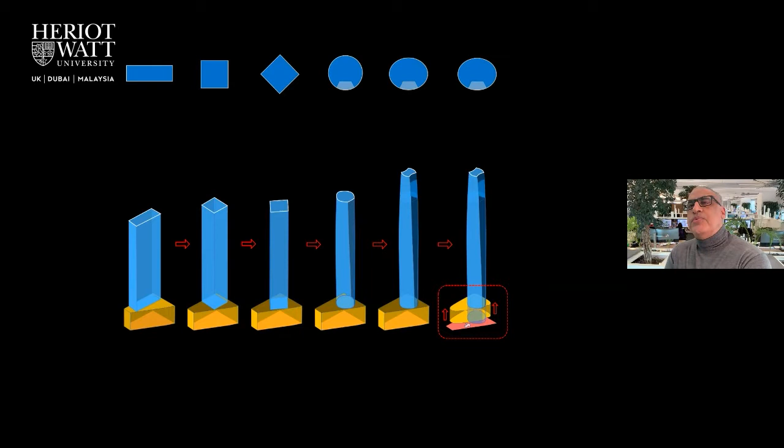And over a period of workshops with our client, the First Group, we came to realize that the challenge we face in some ways is not that different from a square peg in a round hole. How do we design a tower on a property that's designed for a rectangular building? And we felt actually what we wanted to do was a circular building.

And not only that, our aspirations and our client's aspirations were that this building should be unique, not just in its form and its aesthetics, but in its use and in the experience of the inhabitants. So we introduced naturally ventilated gardens. There's 12 gardens that go up the tower. And we did all of this through a series of workshops.

So when we were first looking at the project, it was about 300 meters in height, plus or minus, which would have made it, I guess, around the 8th or 9th tallest building in the world as a hotel. And then we worked with our client, the First Group, to introduce vertical gardens. These are these gardens that go up the tower. And when we did that, the building grew by 10%.

And then we felt that there was a unique opportunity to introduce a public facility, which is an observation deck, which will be open to the public, and can be used to really go up the tower and to get these phenomenal views. And so once we did those few moves, we went from 300 meters all the way to 365 meters, which made it the tallest hotel tower in the world. We did not start out with that target. It was a byproduct of our research and also our design iterations.

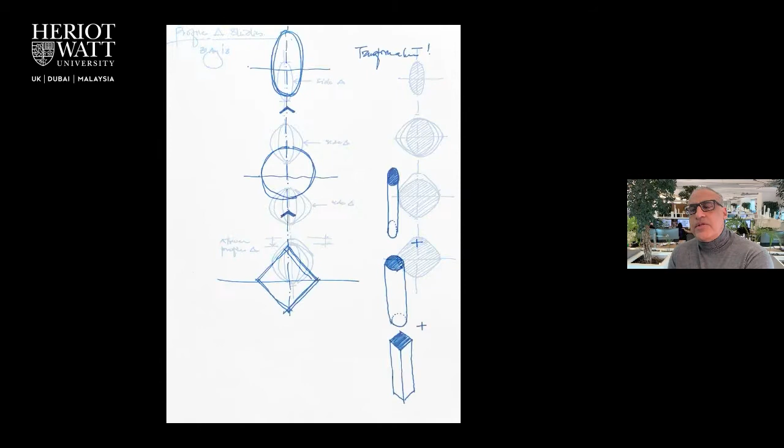We believe in the connection between the hand and the mind, and the use of paper and pen to find ways to express ideas, to convey those ideas, and also to test them. So these are some of the very early sketchbook ideas which started to look at this super tall building in terms of transformational geometry, how the geometry of the tower would transform and how the shaping of the tower would be sympathetic to the very strong sea breeze that comes and hits the building.

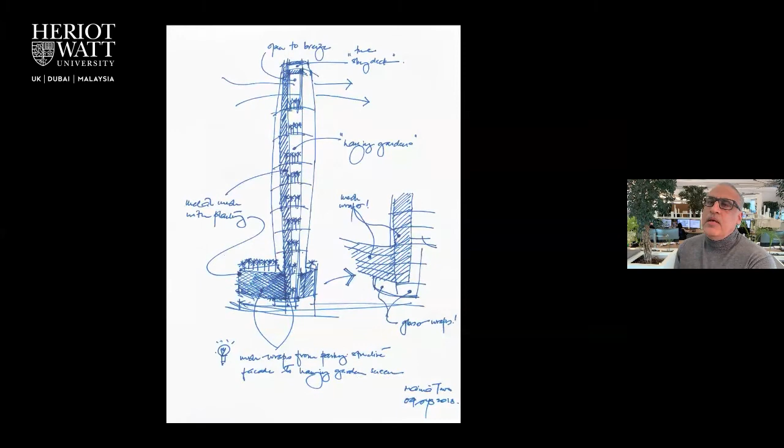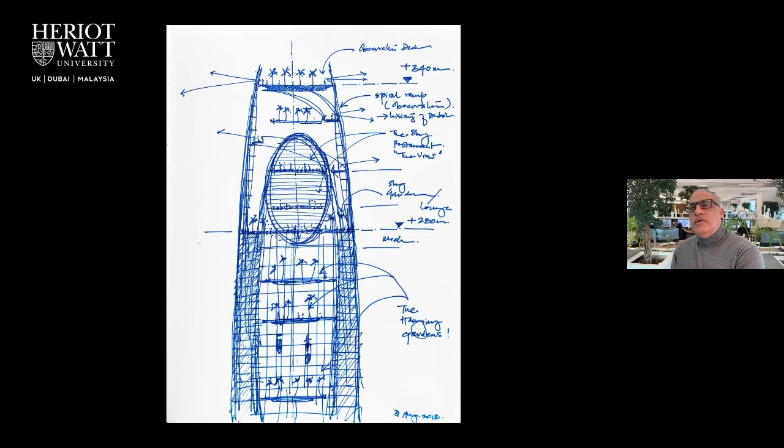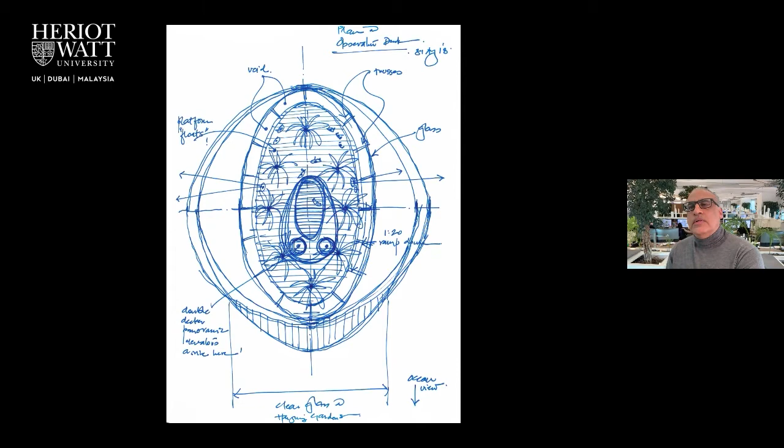And then very early, this idea of these gardens and how the tower would rise from a landscaped podium and introduce these naturally ventilated atrium gardens through the height of the tower. And we also felt that the very top of the tower was a unique opportunity. And we eventually proposed a public facility which will be open to visitors, school children, to take them up to a garden at the very top of the tower, which has spectacular 360-degree views of the city.

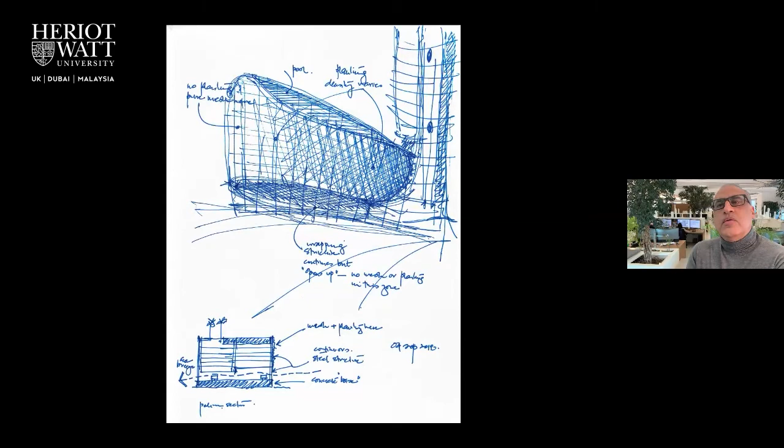And how the tower and its podium weave together, the interface between the horizontal and the vertical, was extremely important for us. And we spent a lot of time making the podium work. And we did that by lifting the podium to introduce a public space. So the parking structure is lifted up by 9 meters, and we end up with an urban drop-off space, which is the entrance to the hotel.

Now, the fact is that design is messy business. So you start out designing in a particular way and you move along, and then one day you get a call, and in this case, a client called us halfway through detailed design. So we'd been working on the project for a year. And they said, we've changed our mind. Initially, the project was going to be 2/3 hotel and the top 1/3 was going to be apartments. And the client decided that they would like it to be all hotel.

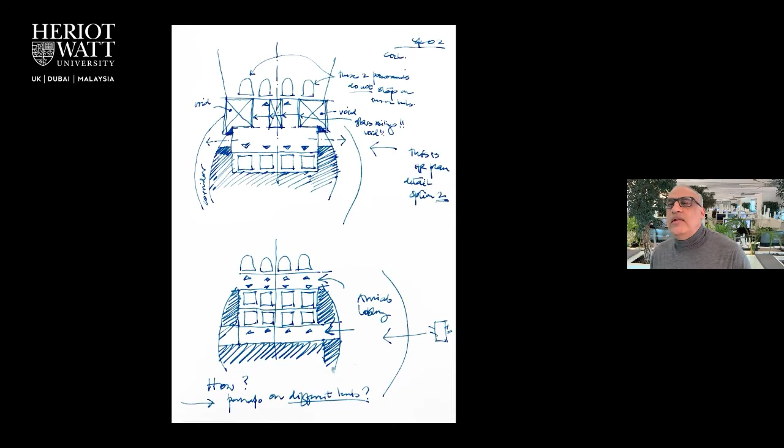So we took a deep breath and we went back to basics. And we did that by redesigning the core from first principles. And I can tell you, it's never easy and it's never painless. But we were determined. And so we redesigned the core, moved the elevators to the front, and we ended up with the scheme that we have today.

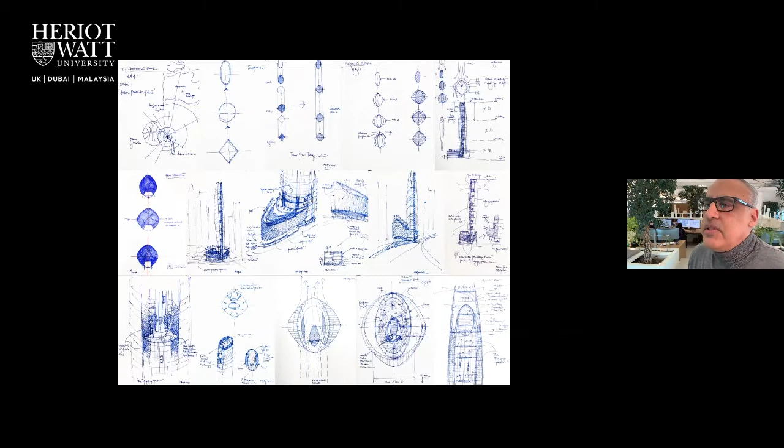Vertical transportation and the movement of people and goods and services in a vertical tower is critical to its functionality. How do we work? We sketch, we build models, we throw away 99% of everything we do, we throw it away. So we're extremely wasteful and extremely iterative in how we work.

These are some of the pictures of our 3D lab. This lab is part of our studio here in Festival City. And we've got some really talented designers who build models. We test them. Our studio is full of hundreds of models, which we build 3D printed, handmade, laser cut. And these are just a few of the studies we did for Ciel.

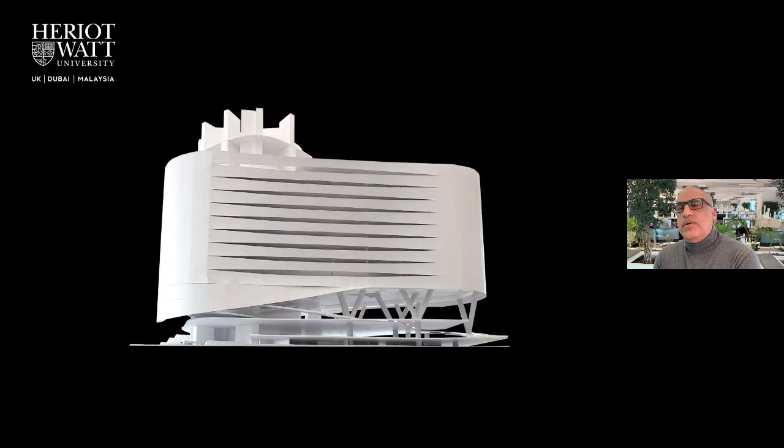And you can see the idea of using physical models very early in the design to test ideas. So here we are testing some ideas on how we were going to wrap the parking structure and yet bring natural ventilation. Eventually, we ended up with this scheme, and you can see some of the models are quite large. So we just build and build and build models, and we keep asking ourselves, is this really the best we can do? It's hard work, but it's worth it.

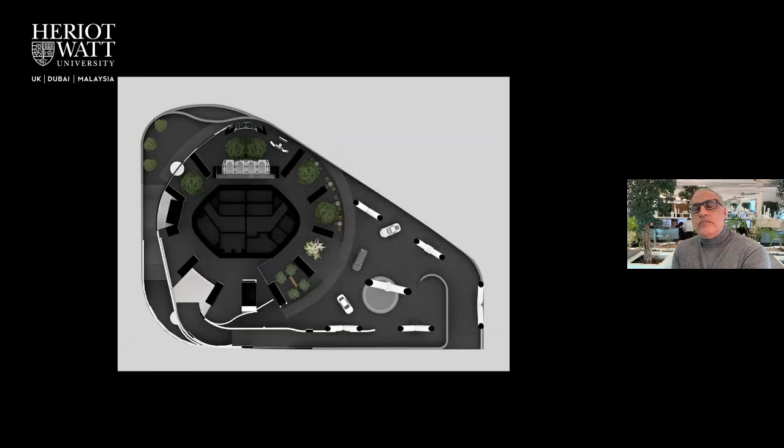Because buildings and urbanism at the end of the day is three-dimensional. It's not just the plan, it's not just the elevation, it's everything. So this is some of the studies we did, and another study model just to look at the drop-off of the hotel. And you can see that we get quite involved, not only in physical modeling, but then we test the spaces, we produce renderings, we question the details.

For us, it's everything. It's not just the parti or the large concept. It's not just the detail. It's not just the lighting. It's not just the materials. It's everything. And we must have built, I've lost count, many, many models for the atrium.

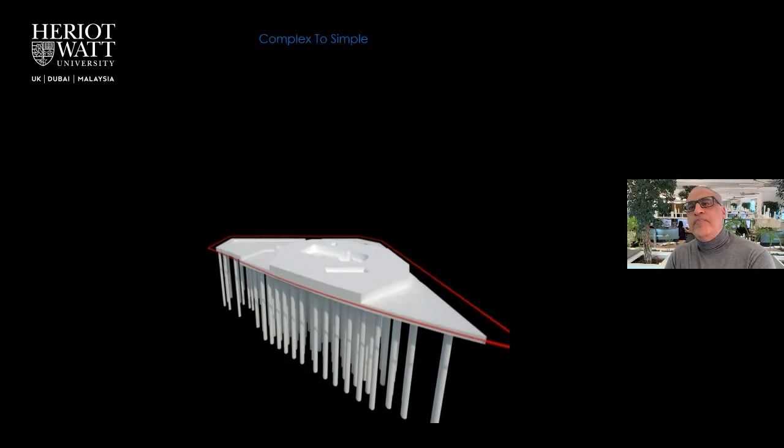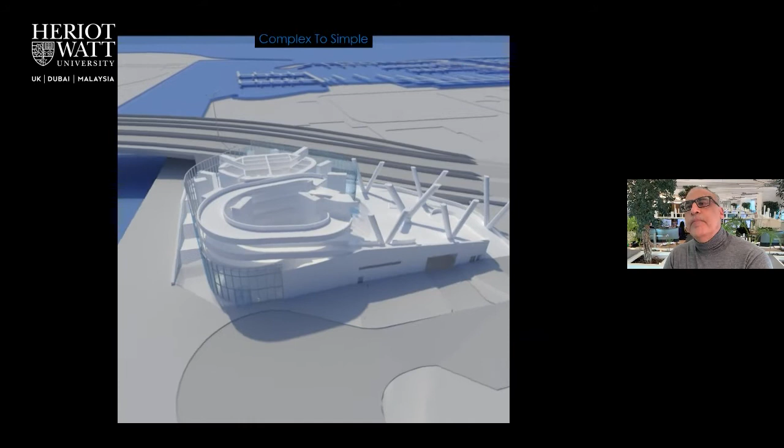So this short animation shows you the challenge we faced because the piles were already in the ground. So our engineers very early studied how we could redesign the tower completely as a circular building, resting on the existing piles and supplementing those piles with some additional piles. And this animation really focuses just on the podium. And it gives you a sense of how complex a piece of machinery the podium is. And you can see the circular tower rising from the back.

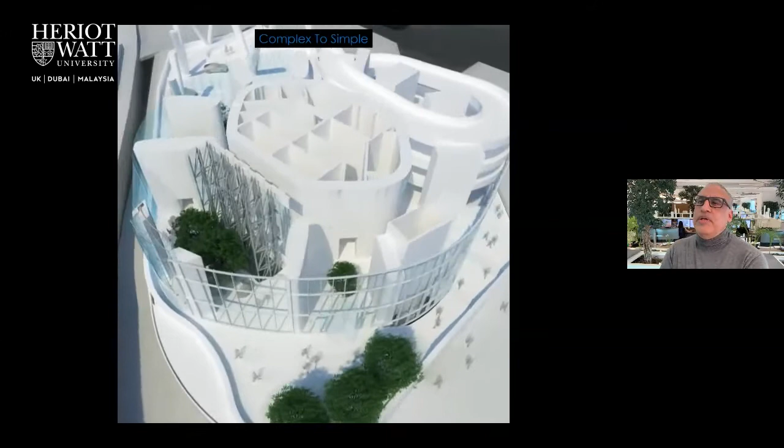There's a double helix ramp that takes cars up from the drop-off, and there's obviously a helix ramp that brings you in. And then this concept of gardens. So the entire concept of this tower is really based on this notion of bringing the public realm into the tower and bringing natural landscape and natural light into the hotel lobby. So what you're seeing is the hotel lobby, which will be a discovery, like a secret garden that people will discover when they arrive.

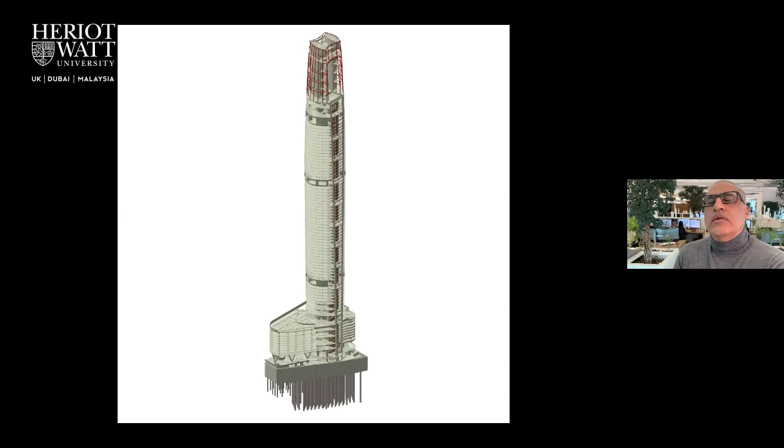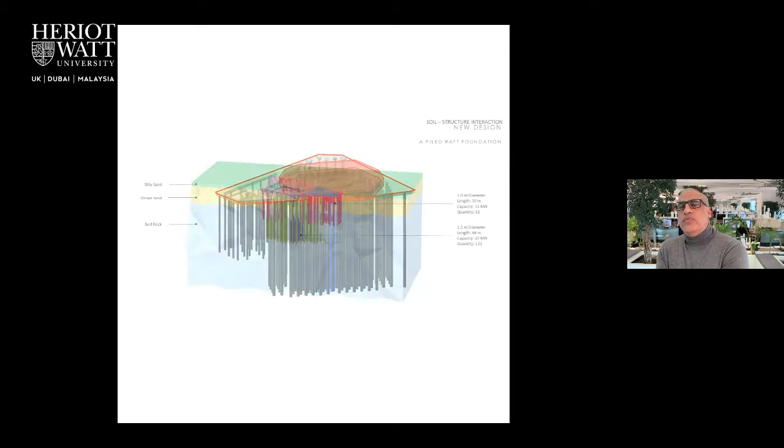So that was the presentation on what I call first principle thinking. Going to forms and forces, as you know, one of the very early challenges we faced was the fact that there were already piles in the ground. So our structural engineers looked at it very early on and we said, yeah, we can do it. We can come up with a completely new design by adding 32 additional piles. And we worked with some really amazing soil engineers who looked at the soil. We modeled the soil, we modeled the stresses.

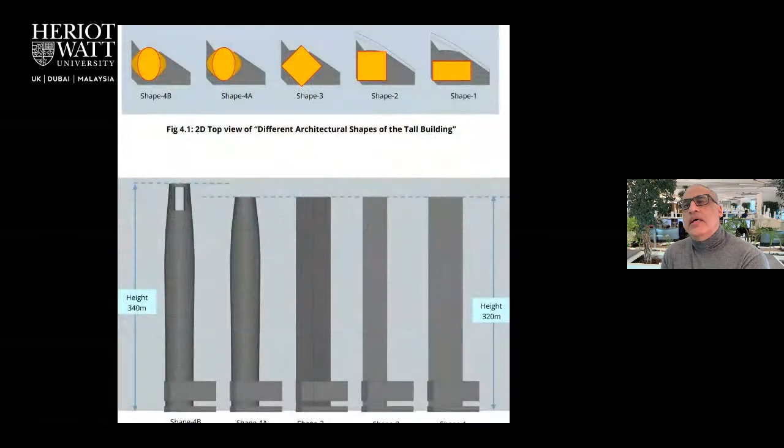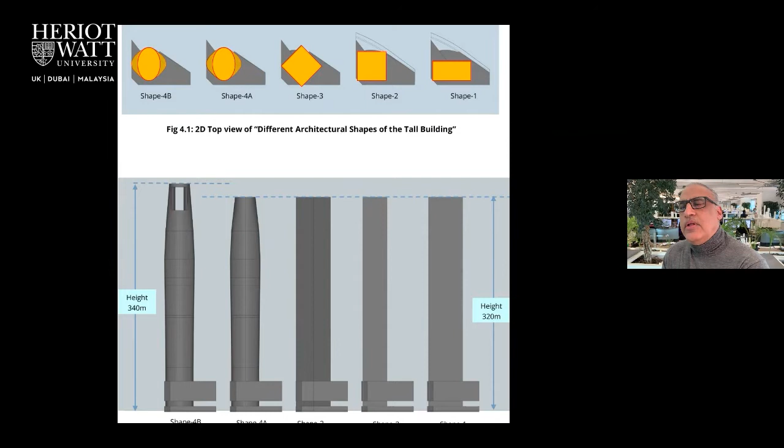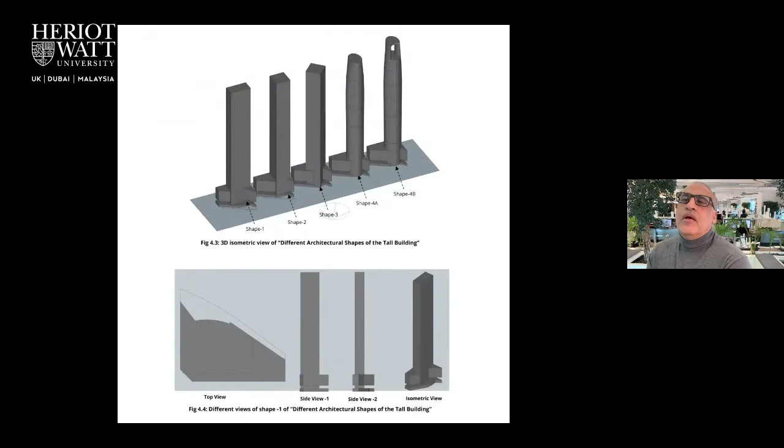We obviously wind tunnel modeled the tower. This wind tunnel is in India. It was designed by a Canadian wind tunnel specialist firm. And we tested very early in wind tunnel, but also using computational fluid dynamics. We tested different shapes for the tower. This was all done during the first 3 or 4 weeks of the project. And we looked at the prevailing wind conditions, the incoming breeze, and we tested what the impact of the breeze was on the lateral forces on the tower.

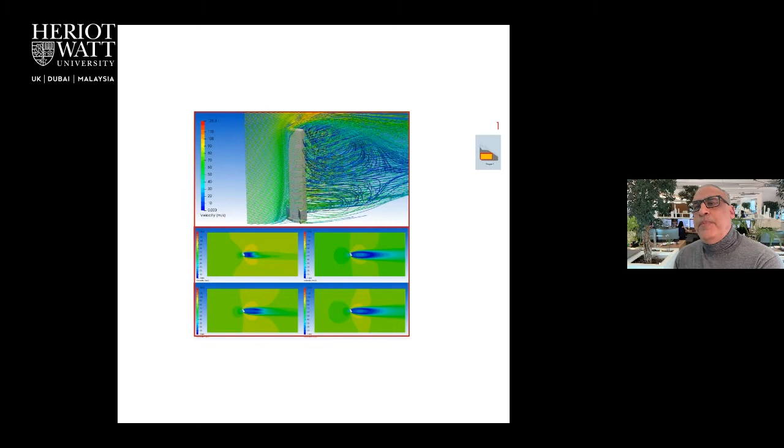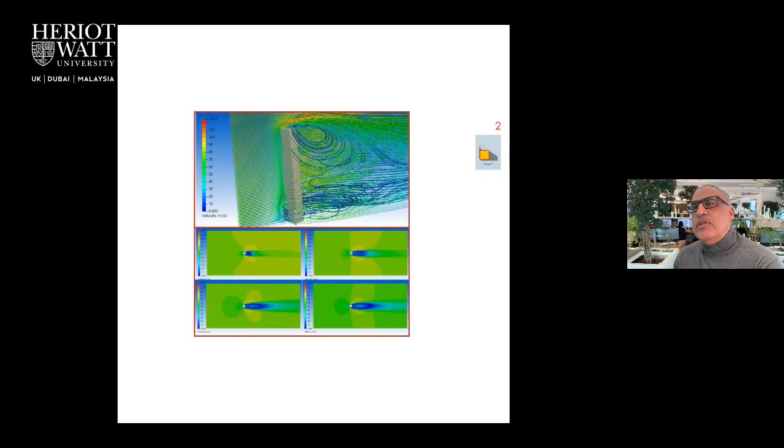And the base case was a rectangular building facing the ocean. And you can see the vortices that are forming on the leeward side of the building. These vortices then result in a force, a dynamic force that is perpendicular to the direction of the wind, and that creates tremendous oscillation and the need to introduce a lot more structure to dampen that movement. Now, as we change the shape of the building, as we move towards a circular building, you can see that the intensity of the vortices is much reduced.

And that means a lot. So as we move from shape 1, which was rectangular, all the way to shape 4B, which is circular and tapered, we were able to reduce the horizontal forces by about 40% relative to the base case, and the moment by approximately the same amount. And that is our thesis. The forms of buildings, in this case a super tall building, have to be informed by real mathematical and engineered analysis.

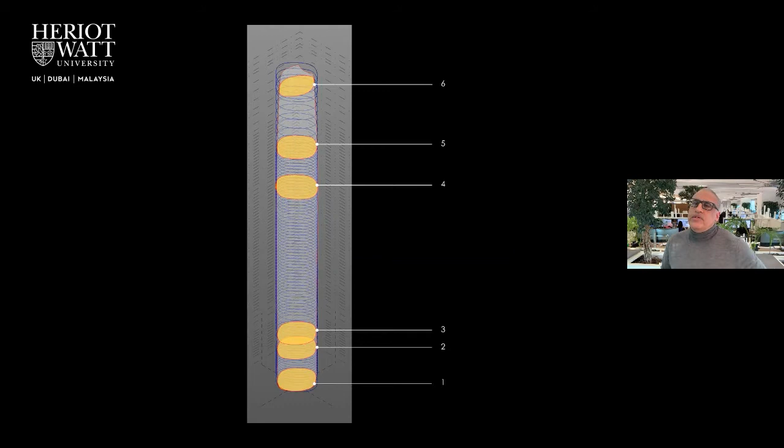We had a similar challenge in cladding the building, because once we designed the building as a circular form that's tapered, we faced the challenge of how do we enclose it? How do we enclose this building in glass? Not easy. So what we did, we looked at the geometries of the floor plate, which you can see here, and the geometries are changing. So as you go up the tower, no two floor plates are the same. Every floor plate in this 82-story tower is unique.

And the challenge is how to put flat glass panels on a warped surface. And the answer is you have to warp the glass. The glass has to be warped. Now, glass doesn't want to do that. Glass panels, when they are made in a factory, are generally flat. So we used parametric modeling to study just how much we could warp the glass. And that's a tricky thing.

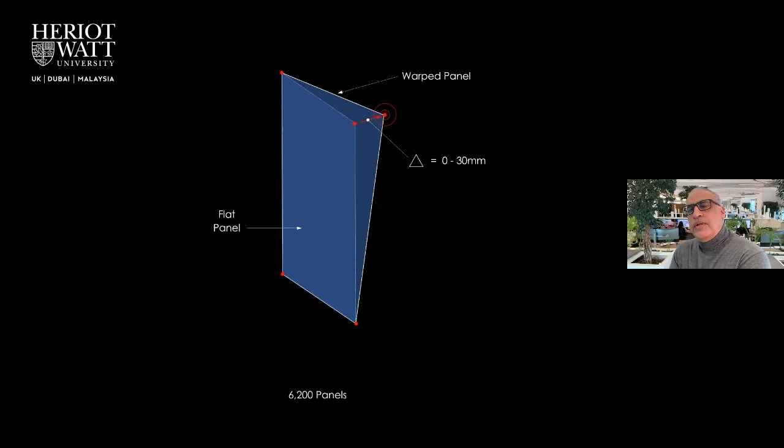So you start with the flat panel, and 3 points of the flat panel are static, whereas the 4th point can be either pushed or pulled to create a warped glass panel. But that pushing and pulling happens on site. When the glass panel arrives on the construction site, it's flat. So you can imagine that you can only do so much. If you go beyond a certain amount, you probably get into trouble.

So what we did is we color-coded how much we could warp the glass. The green represents very slight warpage, and then as you move to red, it's much more warpage. But even the red works. But the idea is to maximize the green and the yellow and minimize the red, and then of course not to go beyond the red. And so when we started the modeling of the glass, we found that about 1/3 of it was green, about 1/3 of it was yellow, and 1/3 was red.

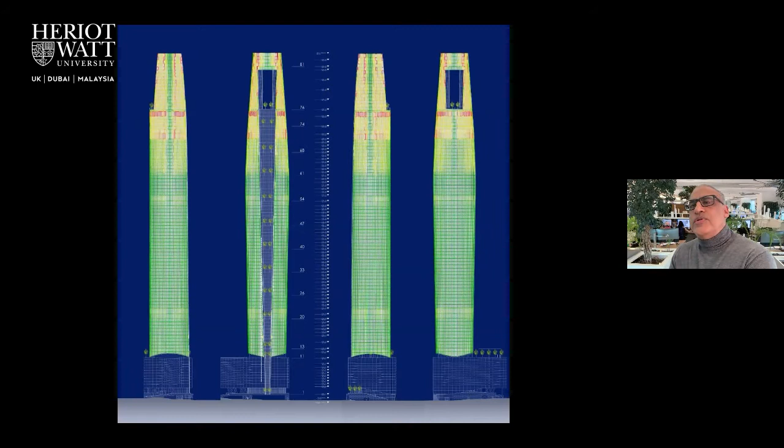And so we used our parametric modeling in an iterative way to adjust the panel sizes and also to adjust the slab edge geometries until 82% of all the panels were green, 16% were yellow, and only 2% were red. And this was a process. This didn't happen overnight. We had to run the algorithm for a number of months, study it, to come up with a solution where most of the building was green and yellow, and a very, very small amount was red, which you can see. And red works also, but we were able to do that.

And I find that process fascinating, because if you want to do design that does push boundaries, you have to embrace the math and the technology and the engineering. It all has to work. The question then arises, does the building work? So it's a nice looking building, but does it really work?

And what's interesting about tall buildings is the challenge of moving people and moving goods and services. That's a huge challenge. This tower has 21 elevators. 16 of them are passenger and 5 of them are service elevators. And as we do in all our tall projects, we need to really look at the matrix. We need to really understand who's serving what, and also how goods move through the building. Raw goods, prepared goods, waste, soiled dishes, clean linen, dirty linen.

And it's fascinating. I actually find all of this really exciting. So the building is a machine, as Corbusier said. And in a way, it's almost like a Rubik's Cube for those of us who remember this. You're trying to find a solution where you can get things to work, hopefully without a meltdown. It's not easy, but it can be done.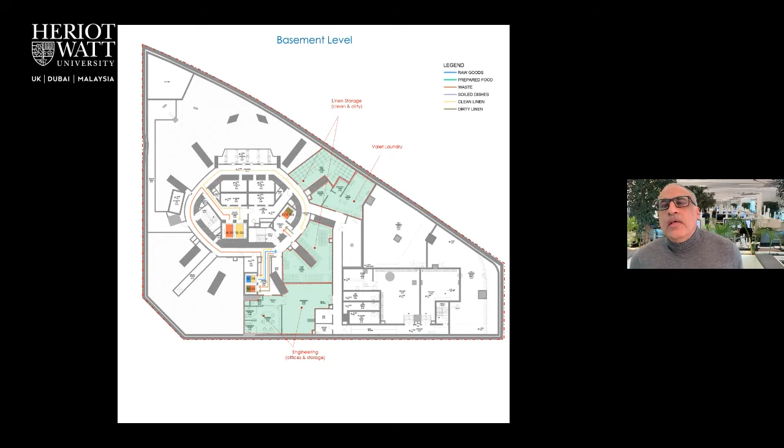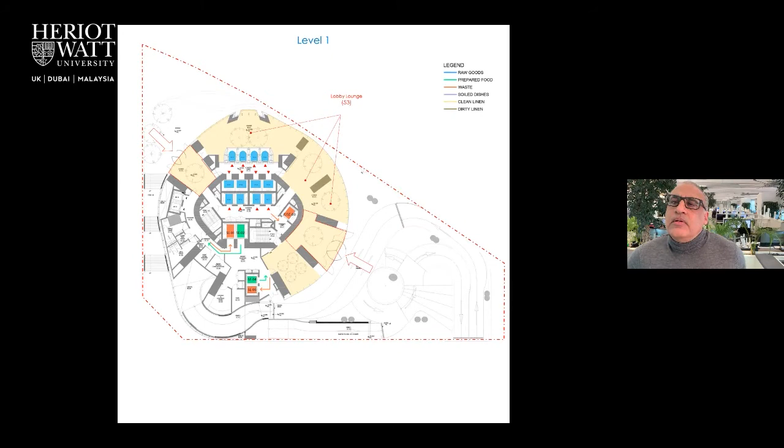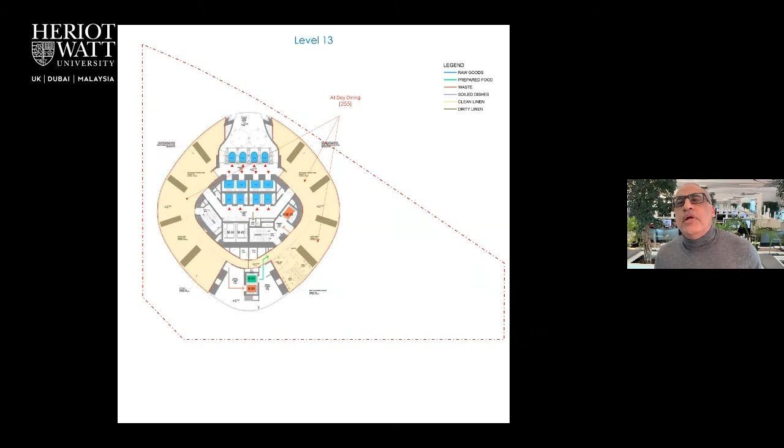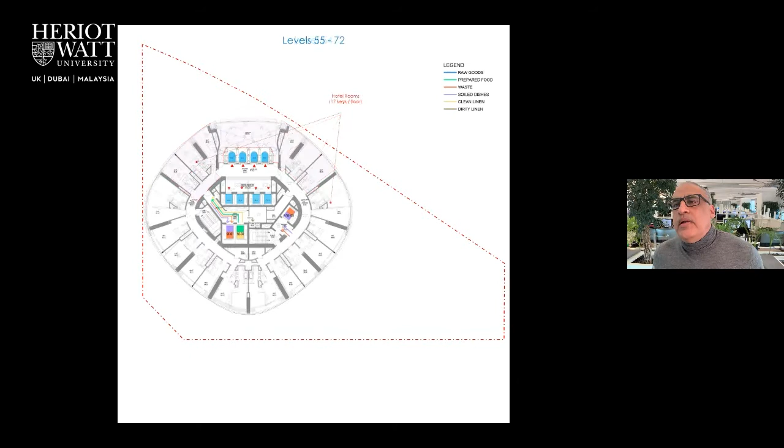And while we try to optimize the solutions, we have to accept the constraints of the site, of geometry, of density, functionality. So there's always this tug of war. There's a push and pull as you look at a project and its elevating, not only passenger elevating, but also its service elevating. It gets very complex very quickly. And we are fortunate to work with some really smart people who can run the numbers for us.

And one thing we discovered is that when we compared CL to some of the other hotels in Dubai, some of which are 5-star, CL's performance is much higher in terms of the capacity of the elevators, the waiting time, what's called interval time, how long you have to wait before the elevator arrives, the service elevator. So we feel we've got an interesting scheme here.

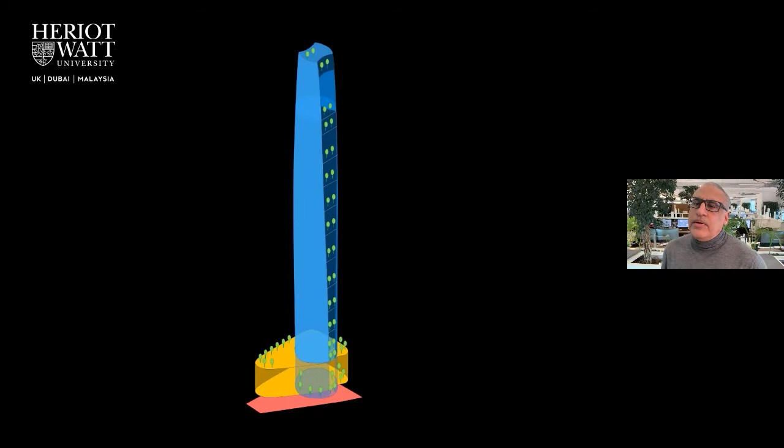I want to talk about towers and trees and our fascination, and in some ways our obsession, with bringing landscape into our work. Because as much as we believe that density is the future, and it's the future for sustainability, density has to be done right. Doing density right is not easy.

And what we've proposed in this tower is 12 gardens that climb up the tower. There are 12 of them. But what's really exciting is that we have computer-controlled louvers in the atrium facade that in the cooler months of the year, we bring fresh air into the gardens and create a natural convection current. And it works. So the trees that will be in these gardens will be real trees.

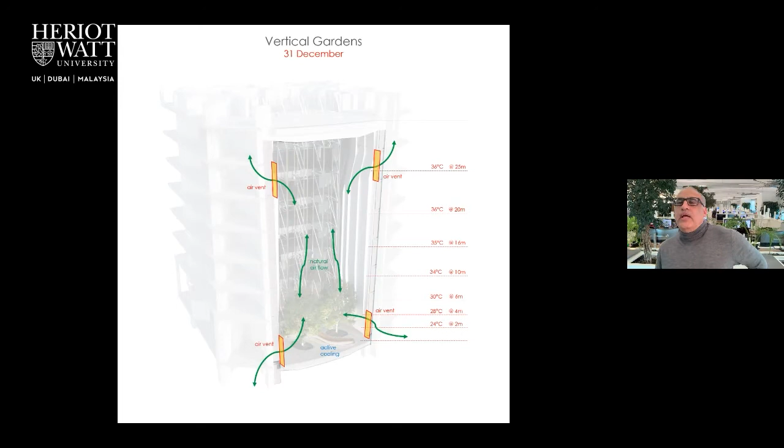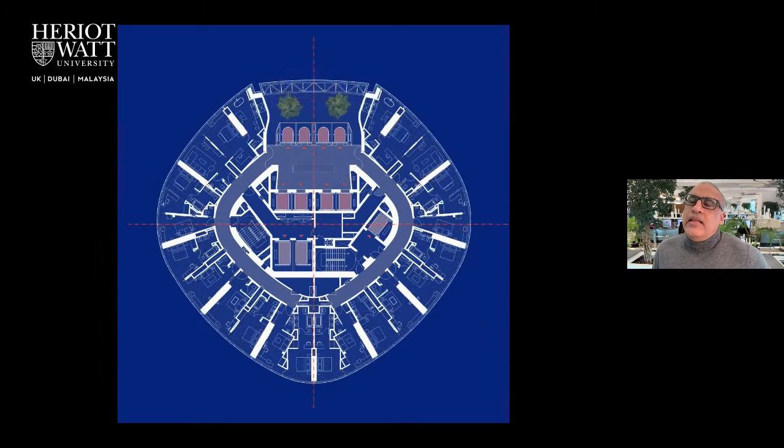And as much as I love models and renderings, I love beautiful plans. I think if the plan is elegant, the building can be very elegant. And we try that. We spend literally thousands and thousands of hours working on plans. Corbusier said plan is the generator, and it's true. And so working between plan and section and trying to embed within our work meaningful public space and shared space, meaningful landscape environments is really an obsession. And we experiment and play with this on most of our projects. CL is just one example. We do that also on horizontal projects.

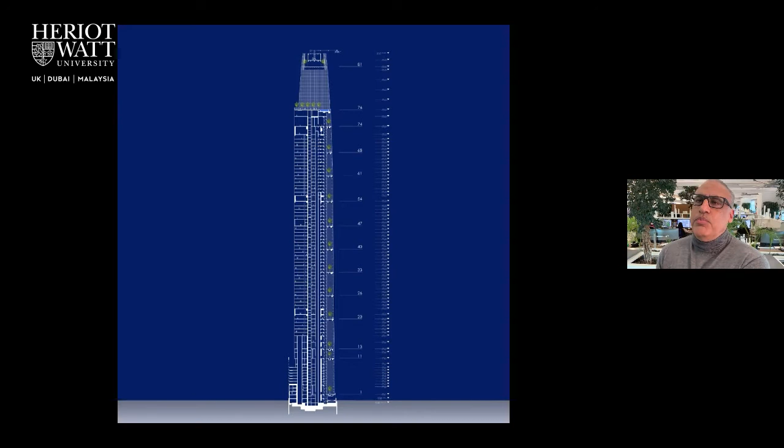Finally, I'd like to just talk about people, because our work ultimately is for people. People will occupy these buildings and we hope they will enjoy them. And for our work to be memorable and to have meaning, we believe that the interior design and the exterior should work together. And for this project, our interior concept is actually similar to the exterior, where we have strived for simplicity and elegance. Very little decoration.

So the inside, in some ways, is very, very elegant, minimalist, clean. And we think that there's a value to that. We think an interior design that has that simplicity of thought, clarity, use of materials can be really meaningful.

I hope that was entertaining. I may have gone slightly over, I think a couple of minutes over. We're tremendously proud of this project. We're tremendously proud of the people who worked on this project. It's been a very, very challenging design project for our group, but it's allowed us to push our own boundaries and to believe in ourselves as to what we can do. Thank you very much.